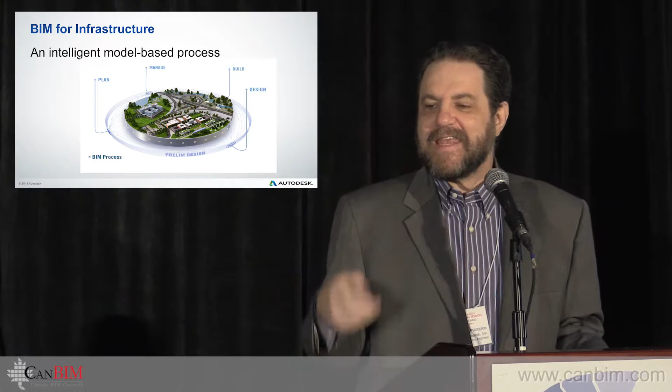The idea, though, is to get it digital and keep it digital throughout the life cycle process. Planning, designing, building, managing, and repeat, especially if you're a municipal owner or a government owner. You own it forever. If you're a subdivision developer, once the lots are sold, you're down the road. But if you're a municipal owner, it's yours for life.

And during this process, every time there was a handoff, the blue line down below, you lost some momentum. You'd do some hand sketches and hand them off to an engineer. That engineer would then try to read your writing and interpret your intent. He'd mark it up, hand it back to you, back and forth, back and forth. I've seen some of these go through 30, 40, 50 times. Keeping it BIM, getting it digital early and keeping it digital, keeps that momentum built.

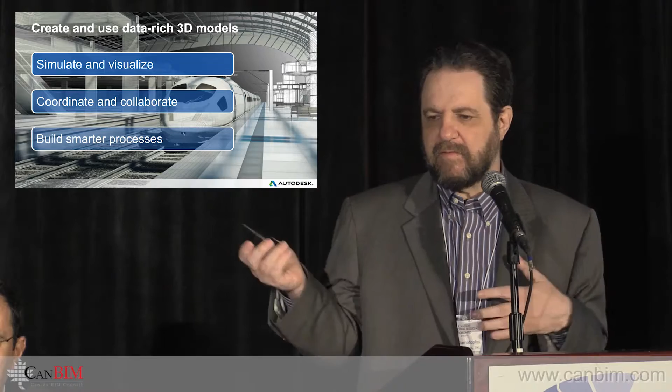So transforming from the traditional way into BIM is building this data-rich model. And it becomes an extractive model because you can actually get more information out of that model than you ever put in, because everything is in context. There is a context for everything. Everything has its place and a place for everything. Also, it facilitates collaboration. In fact, it almost demands collaboration. And it allows you to maintain consistent data across the life cycle. And in the case of municipal owners and government owners, this is perpetual.

So it's important that what you leave them with is something that they can begin again when they have to expand or redo the project every 20, 30 years or whatever that is. Plus you can understand potential impacts, you can try different things out at a much lower cost than you ever could before. And because you're developing rich visual presentations throughout this process, you can engage stakeholders much, much earlier.

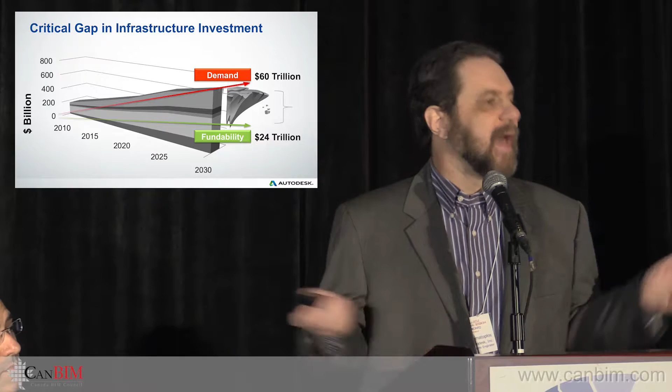So why now? Why is it a big deal now? This is based on the McGraw-Hill data, and it's the Smart Market Report. You see the demand moving forward to 2030 is 60 trillion. The fundability, based on current funding mechanisms, is $24 trillion. How do we close that gap? We got to work smarter, faster, better. We absolutely have to do that.

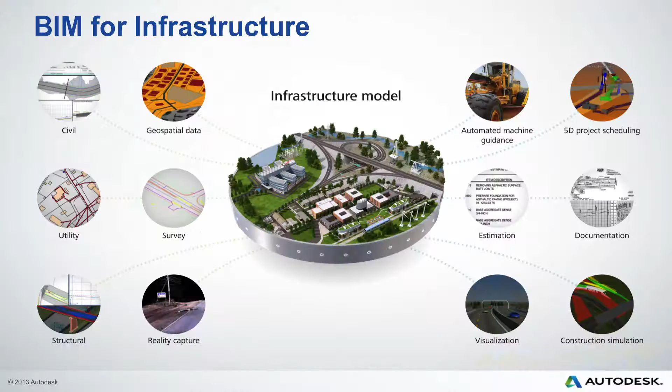So you've seen this slide in the previous presentation. I don't know who borrowed it from whom. But this is kind of the circle of life for BIM. The implementation of this is accelerating. And it's beginning to catch on, it's beginning to take hold. People are starting to demand this as a deliverable.

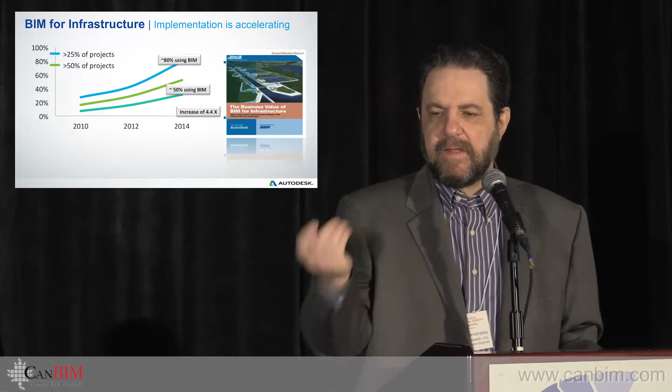This is a little slide here showing kind of a global trend in the US and Canada, 4.4X growth in the last 3 years. In the US, the Department of Transportation is driving this. There's a number of drivers in Canada for it and globally throughout the world.

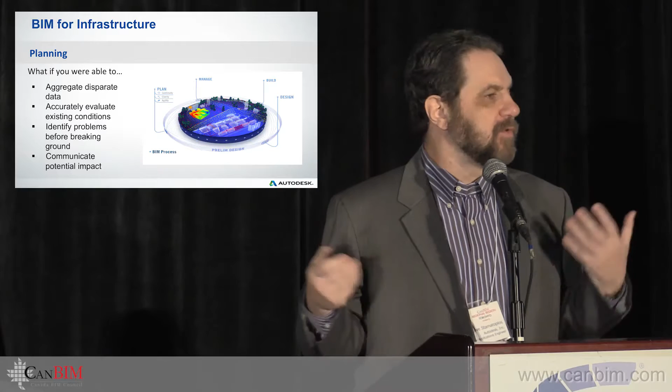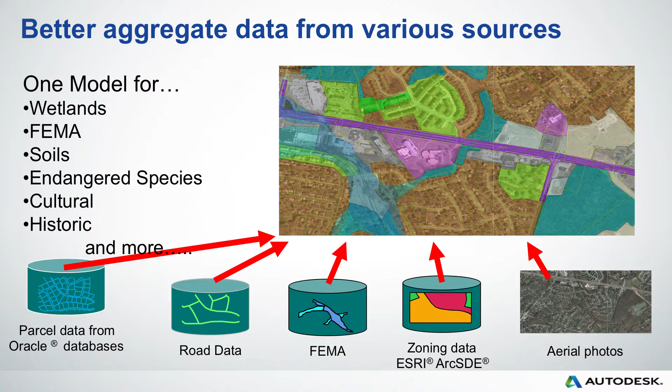So what if you're able to aggregate all this data, get it digital, keep it digital, communicate the project impacts to people easily, and evaluate multiple scenarios in the process? Using one single model to aggregate data, parcel data from an Oracle Spatial database, road data from whatever format it's in, flood data, zoning data, aerial photos, and bring it together into one single rich model, and then have a context upon which to move your design forward.

So you can engineer early. You can actually start the engineering early, and as changes happen, you can react to those changes much, much quicker because everybody is collaborating into this single data repository and adding and extracting intelligence from the model.

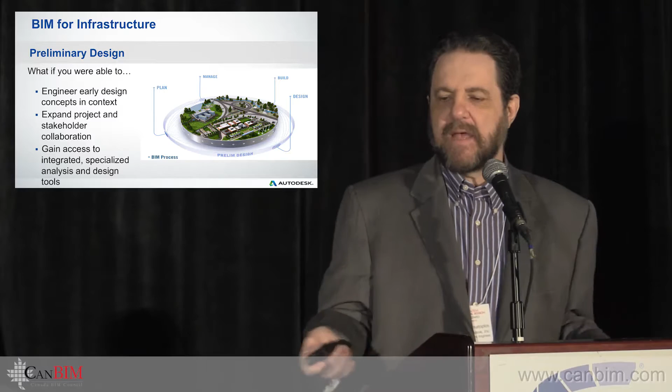So I don't know if this video will play. It won't. As far as design, making changes without blowing the schedule out. This is a big, big thing. And in my 35-year career, this was the big thing. You know, this keeps you from having to work all-nighters the week before a project submittal is due. And as well as integrate analysis into it.

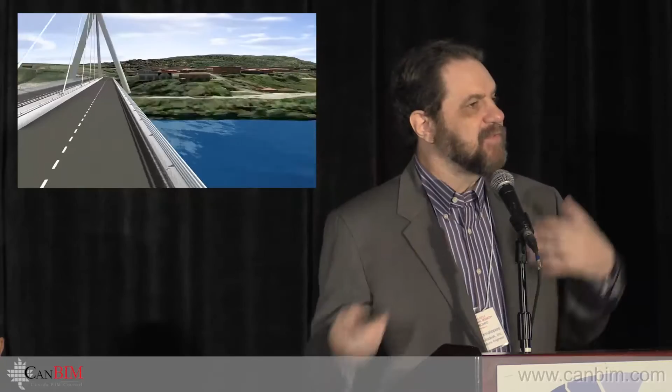I used to be the stormwater guy. Everybody else would have their crack at the project, and then when they were finally done with everything, they'd hand it to Steve and say, here, Steve, put some of that drainage stuff in here and get it out. Well, by then, I'm boxed into these little corners. No degrees of freedom on this. Whereas if you integrate simulation and analysis into the process, then you can move ahead with the rest of the design. It kind of gives you equal footing with the rest of it, as well as produce documentation by simply extracting it from the model.

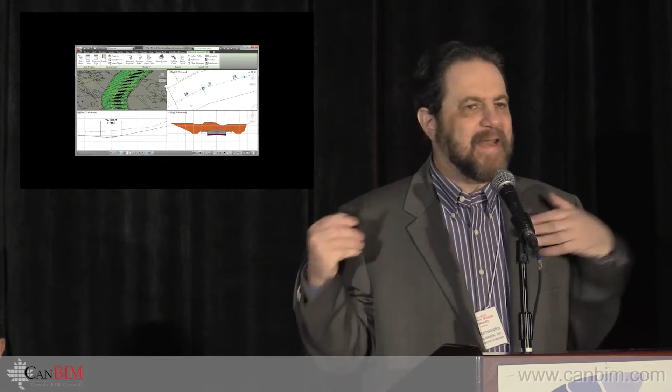And again, here's another video that probably will not play. But it's all about intelligent design. You move it in plan view, it moves in the profile view. You move it in profile view, it moves in the plan view. You move it in section view, it moves in all views. So it ties all this stuff together. It's not having to cut a whole new group of sections. I pick up the mouse, move the road, move the design.

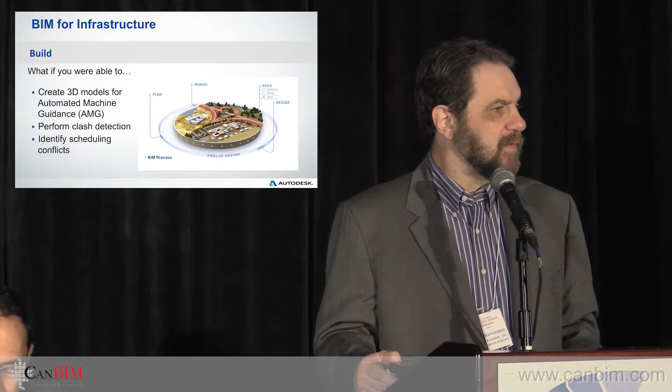As well as what you're left with is a 3D model that you can use for automated machine guidance. You can do clash detection on it, spatial clash detection, and identify scheduling conflicts, as we saw in the previous presentation. You can actually do 4D and 5D scheduling on this, time and money scheduling.

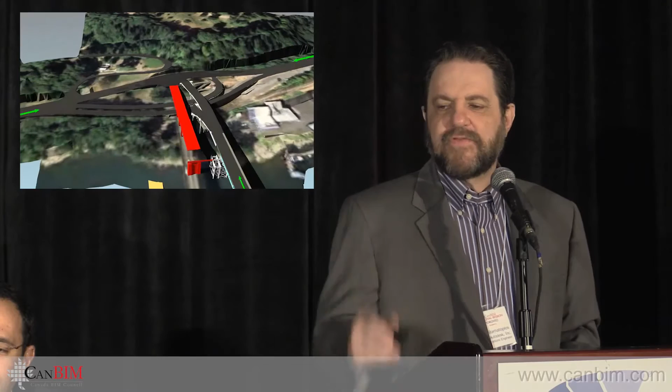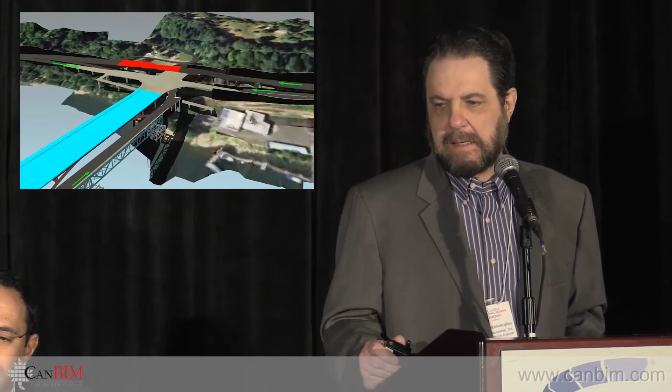This one here will actually play for some reason. And this is, again, showing multiple options and even running some traffic simulation on this with different design scenarios. And you're doing virtual construction, virtual modeling, virtual analysis against a model before it's real, before you cut your plan and profile sections, before you hand it to the contractor. And you can do it in collaboration with the owner and the contractor and get everybody together into the same room.

So bottom line is more efficient workflows, greater predictability because you're doing analysis early and you're doing it concurrent with the design. So obviously it's going to improve your project outcomes and make more informed decision making because you're able to engage the stakeholders from the very beginning in a format that they can understand.